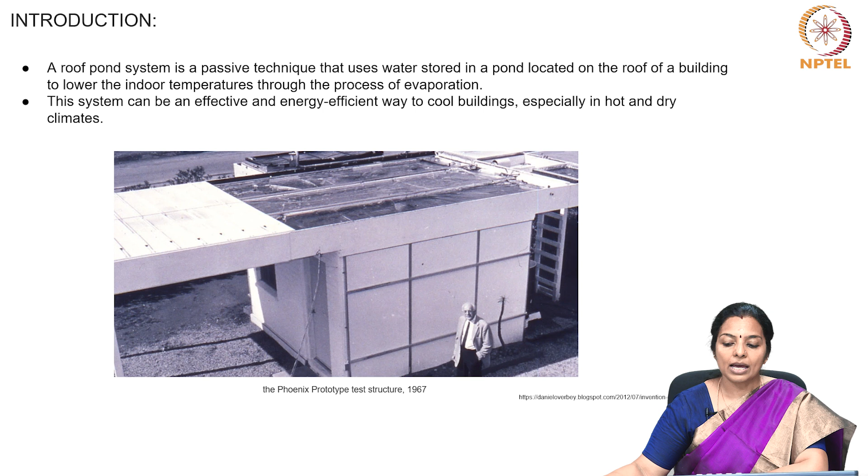Let us now see some of the components required for a roof pond, along with a brief introduction. The purpose-built pond or water storage area on the roof is frequently made up of waterproof materials. So, in order to have a roof pond, you need to have proper and adequate waterproofing done.

So there has to be, if this is the roof structure, an adequate waterproof membrane.

You need pond liners which preserve the integrity of the roof structure and stop water seepage. So the pond liners become another important component.

Also, vents on the inside of the building that are positioned to facilitate air movement and the exchange of cooled air are known as inlet and outlet vents. These are not mandatory, but they can be there.

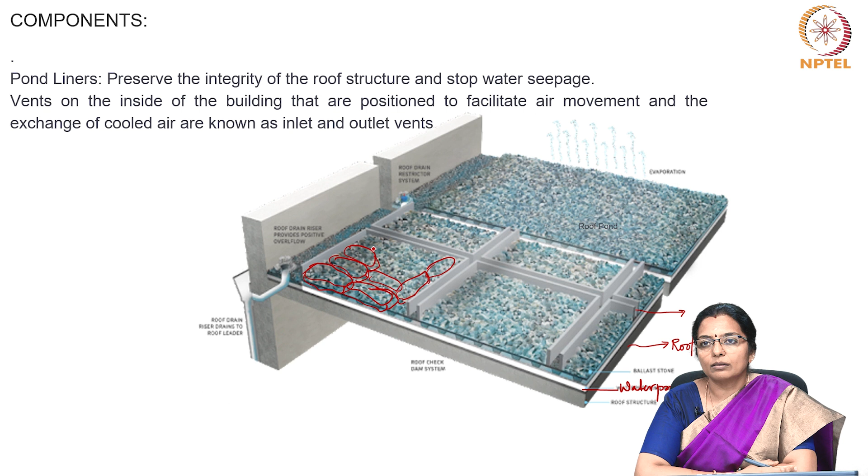Passive cooling has also been shown to provide excellent thermal comfort and consistency of indoor air, along with very low energy consumption.

If we look at the working principle, a roof pond is a passive cooling method that relies on the higher heat capacity of readily available, inexpensive water. The pond is typically covered during the day to keep it from heating up, and it is opened at night to cool it down.

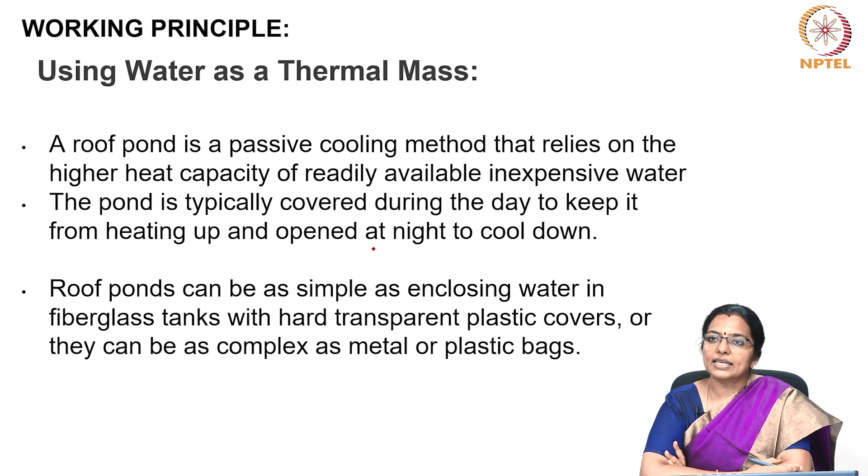Roof ponds can be as simple as enclosing water in a fiberglass tank with hard transparent plastic covers, or they can be as complex as metal or plastic bags.

There are broadly two types of roof ponds: one is uncovered roof pond, and another is covered roof pond. Further, under uncovered roof pond, we can have open roof pond without sprays and open roof pond with sprays.

Under uncovered roof pond, with and without sprays, the roof pond is not covered but is left open to the sky, and one variant is to have water spraying all along, which doubles up in two ways. When we have an uncovered roof pond without spray, we are left to the mercy of the water body to warm itself or cool itself in order to control the indoor temperature.

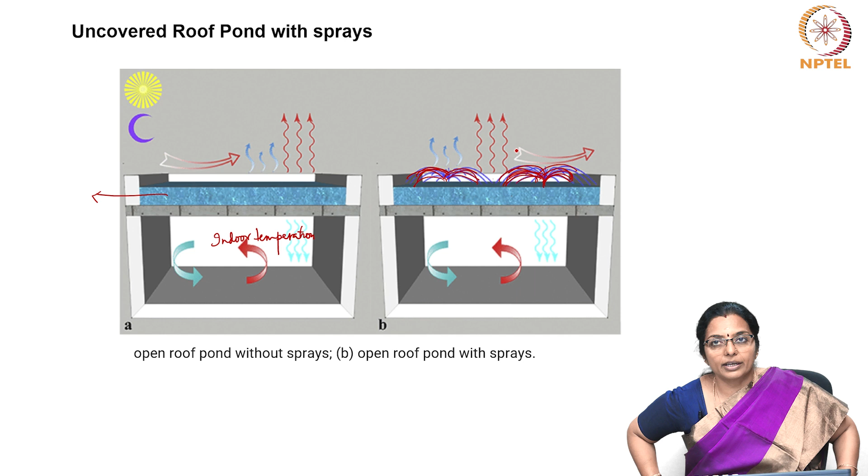But when we have a spray attached to it, what happens is not only does the water on the roof aid in cooling the building, but when new water is sprayed, there is addition of cooler water to the already existing warm water. So the pace at which the indoor comfort or indoor temperature reduces gets enhanced.

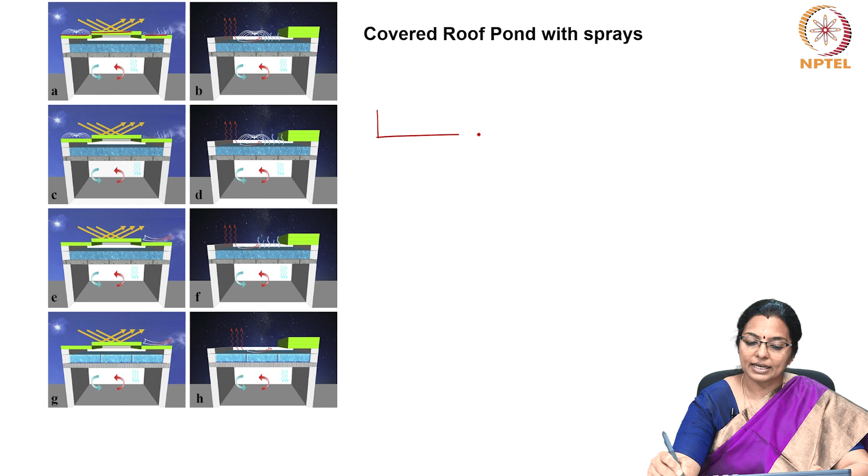The second category is a covered roof pond with sprays. Under this, the roof pond has a cover. So there is a roof pond, and there is water here, and this roof pond has a cover which is movable, which is slidable. If this is the water, this is what I call the cover.

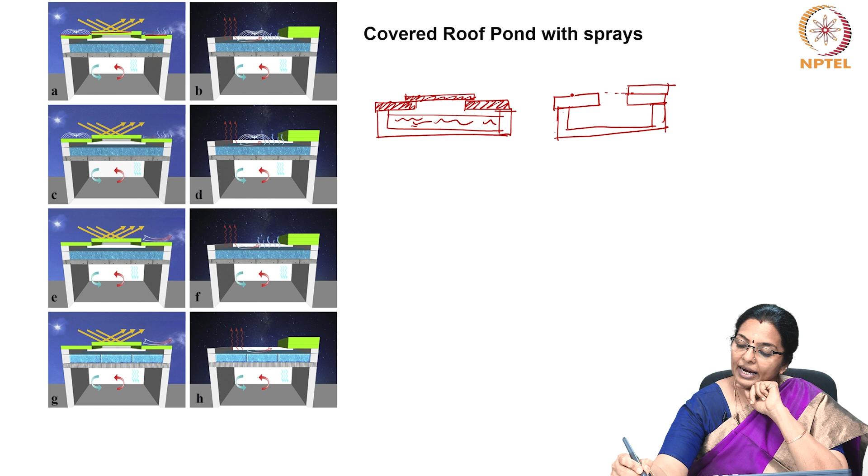One can slide this cover over this, and this can also be slid behind, leaving the tank exposed to the night sky for cooling. So the night sky cooling happens at night, and this is during the day.

Once the water gets cooled at night, this is slid back in position during the day, because of which cool water is actually trapped inside here, and that helps to make the indoors cooler during the day. That keeps the indoors cool during the day. So this is the basic principle.

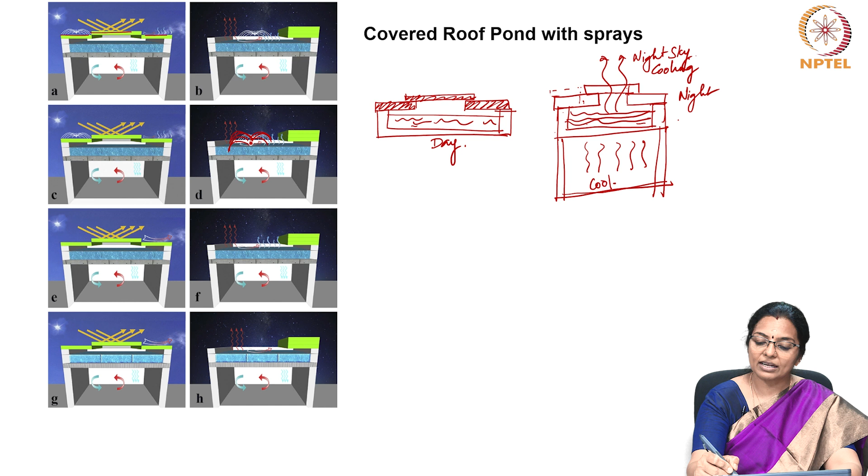Again, in this we can have two types: one is with spray, another is without spray, as shown here. So the sprays can function along with the stagnant water body.

What happens during summer? During summer, we need the indoors to be cool. So during the day, the roof pond is closed. Solar radiation strikes and is reflected back. The water body is there, and because of this water body, the indoor gets cooled during the day.

At night, one has to slide the cover open, due to which the water body gets cooled due to the nocturnal cooling of the night sky, which is the biggest cooling sink. This water gets cooled at night in summer, and during the day this is slid back into position. This is what causes cooling during summer day inside the rooms.

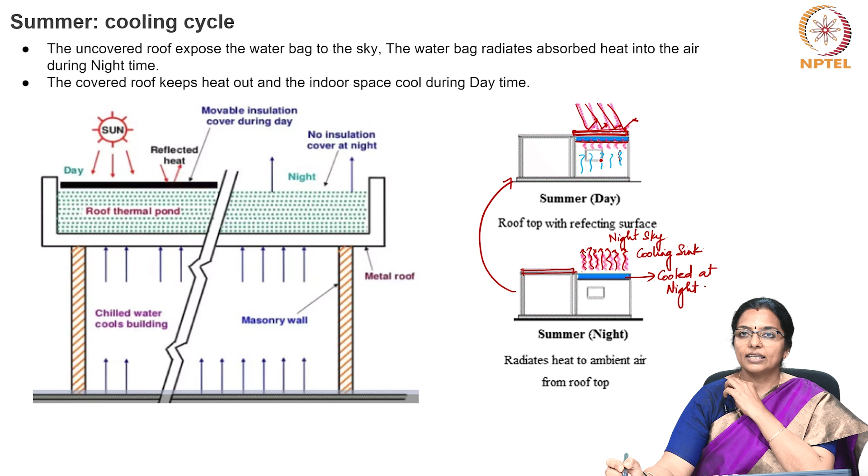What happens during winter? During winter, we would want the indoors to be warmer. So during daytime in winter, the cover is slid open so that solar radiation strikes on the water body and the water body becomes warm due to daytime exposure to the sun.

Now the water gets warmed, and during night the cover is slid back, and the warm water radiates warmth inside the room, which is actually cool during winter. So the room becomes warm and comfortable during winter nights. So the cool roof or the roof pond is used effectively during summer and winter to control the indoor temperature.

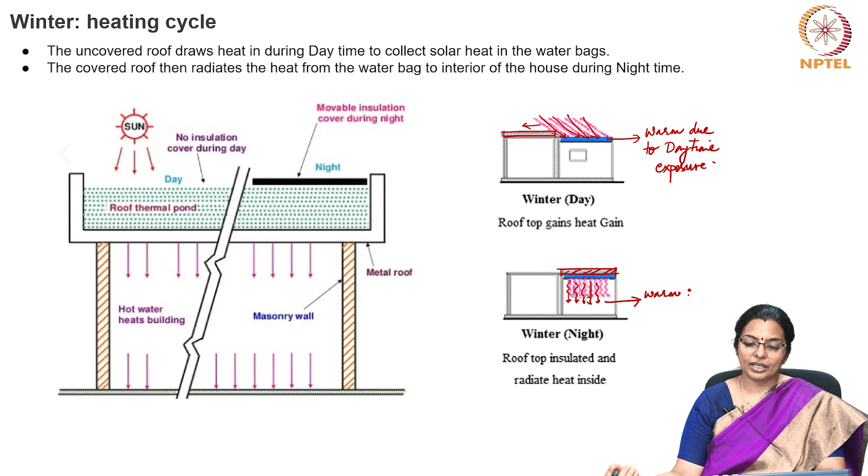Let us now look at the design considerations. First is climate. One needs to understand whether this passive system is adaptable to the climate under question. So adaptability to different climates and effectiveness in specific temperature and humidity ranges must be verified.

Second is the pond size. One needs to determine, by factors such as building size, location, climate conditions, and the cooling needs of the space, whether the pond size is sufficient. Third is materials. Selection of appropriate materials for pond construction is important to ensure durability and water retention.

Fourth is energy efficiency. It's important to understand the results and benefits of using a roof pond. The first is energy efficiency. By using a roof pond, a lot of energy can be saved, and this reduces the need for mechanical cooling systems, resulting in energy efficiency.

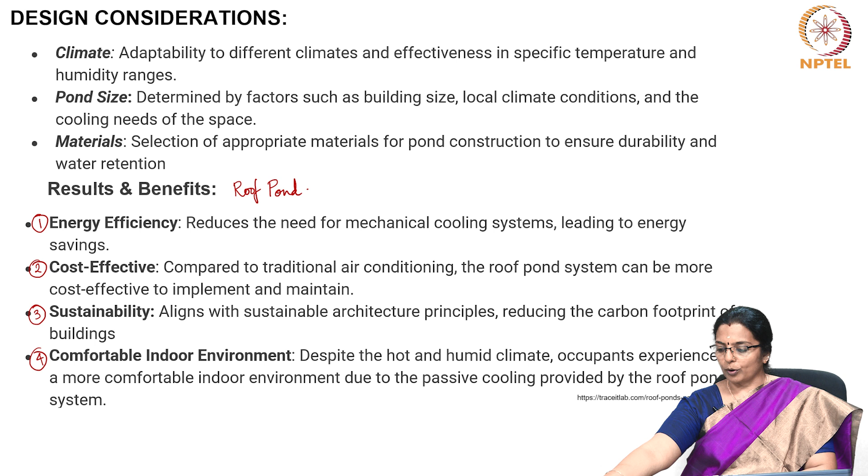Let us now look at the advantages. These systems have proved to be useful in hot, dry and temperate climates. Some variants are also applicable in humid climates, but they have been proved to be very useful in hot, dry, arid and temperate climate.

Roof ponds can also provide co-benefits in terms of stormwater management, and the stored water can be useful for some other purposes too. In case of an emergency, it can double up for fire extinguishing purposes.

The performance of roof pond is not dominated or impacted by the orientation of the building, unlike many other passive systems which have a direct connection to the building's orientation. Also, the roof pond cooling system does not interfere with indoor humidity due to the presence of water, because the water is not directly related to the habitable spaces but is physically apart. So the indirect evaporative cooling system does not bear anything on the indoor humidity.

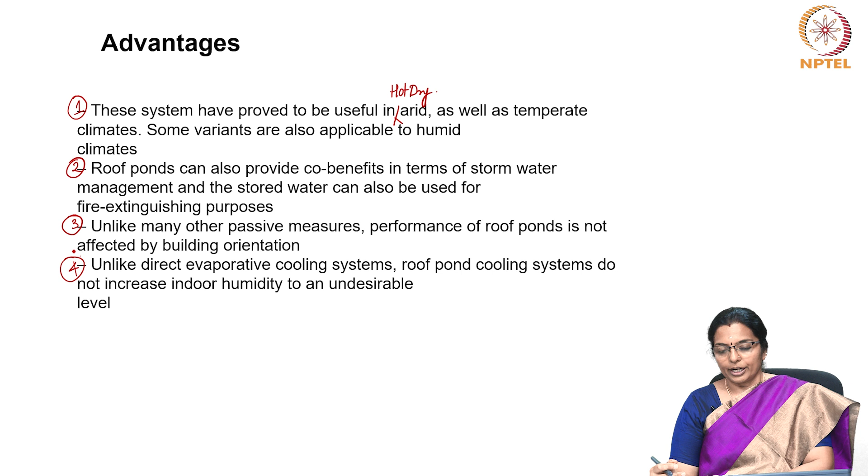Let us now look at the limitations of the roof pond system. Roof ponds increase the dead weight. The dead load of the building gets increased because of a roof pond, and water is actually a very heavy element. So this system is not suitable in buildings which are not pre-designed for roof pond, and they are definitely not suitable in structures which are lightweight.

So these systems are not suitable in buildings that need retrofitting, that is, pre-existing buildings are not suitable. New buildings designed to take up the extra load of the water works for this system.

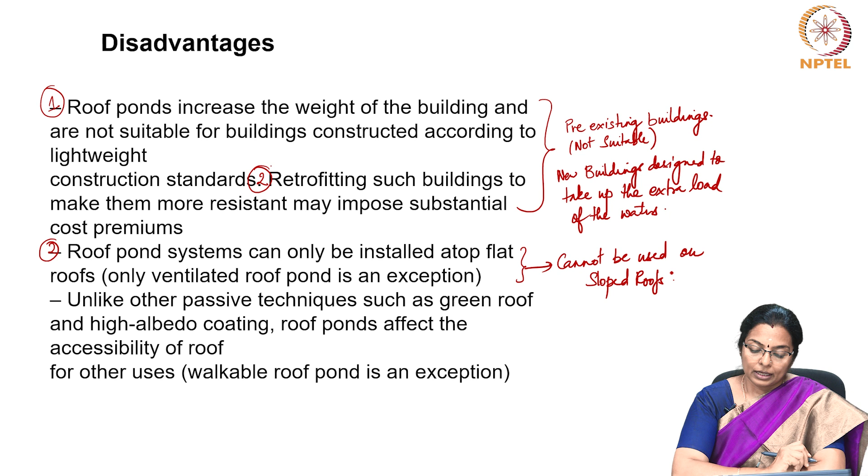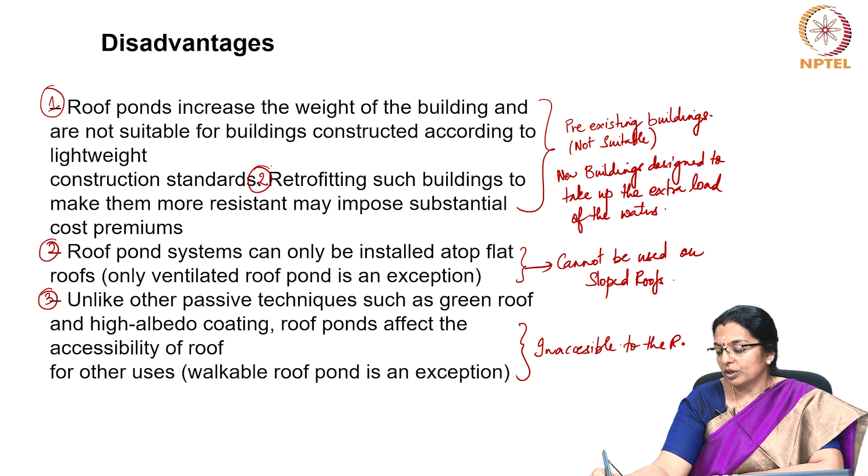Roof ponds, because of the presence of a large amount of water, can hinder accessibility. So they can be inaccessible on the roof. These are the major drawbacks.

Next, we will see the variants of roof pond. So roof pond is basically a principle, and there are many variations of roof pond. First is the uncovered pond without sprays. Second is uncovered roof pond with sprays. Third is the covered roof pond with sprays. And fourth is the covered roof pond without sprays.

The skytherm with its insulation is another variant. Energy roof, which is a hybrid system, is another variant of the roof pond. Then we have cool roofs, and walkable ponds. Sometimes the roof pond can also be designed by incorporating the provision or facility to make it accessible, so these are called walkable ponds.

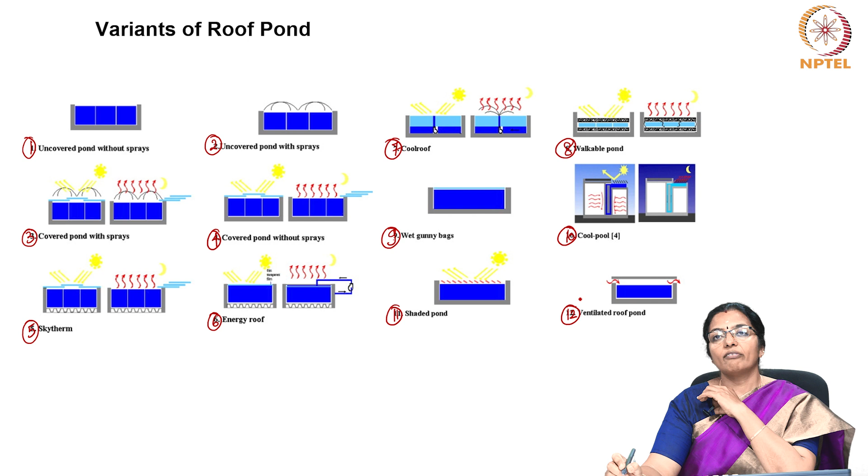Using wet gunnies over the roof ponds is another variant. Then the next variant is a cool pool, a shaded pond, and a ventilated roof pond. These are all the various other options or variants of a roof pond.

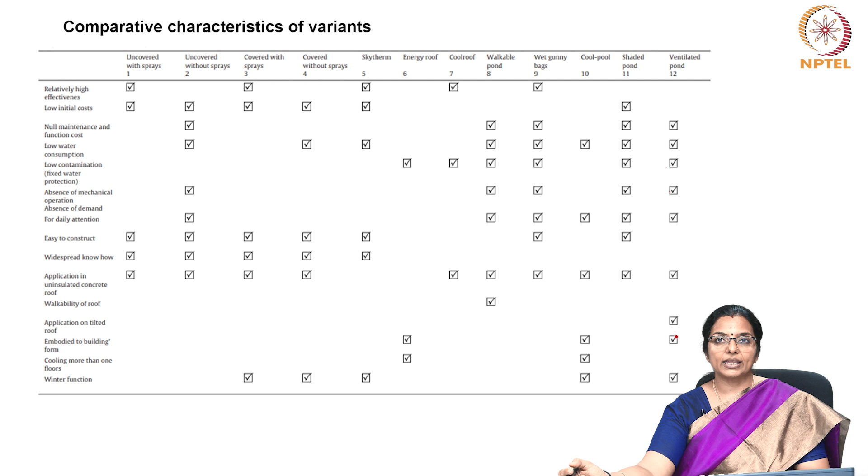So, these are the variants along with their characteristics. We will quickly see a small case study which was done on a prototype called the Phoenix prototype test structure.

This is a 10 feet by 12 feet room, and aggregate lightweight concrete block walls were used with external 1.5-inch rigid polyurethane insulation on the east and west walls. The external insulation on north and south foundations, and a 4 inches thick floor slab with a 4 feet by 8 feet panel of 1.5-inch thick polyurethane movable insulation was used.

On the south side, overhang carport for movable rooftop was used, and a 12 feet by 12 feet window on north and south walls entry door. On the south wall, there was about 6 inches to 7 inches thick water filled bags which were supported on 26 gauge steel sheets.

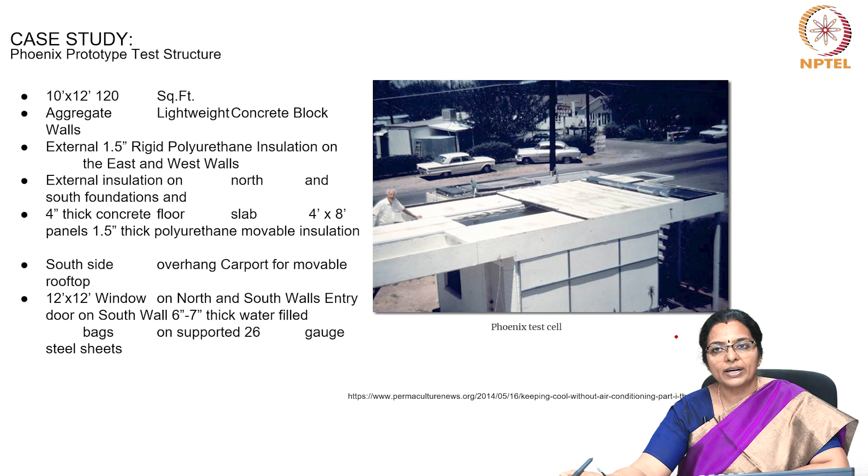The study showed that when the outdoor temperature swung between 95 degree Fahrenheit to 55 degree Fahrenheit, the indoor dry bulb temperature at 5 feet height remained fairly constant, and it was also syncing very well with the water temperature. So, on this scaled model prototype, the roof pond worked very well.

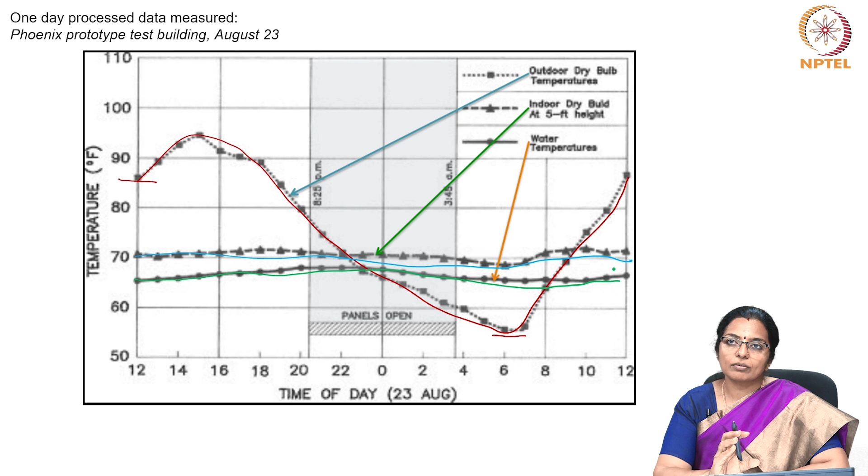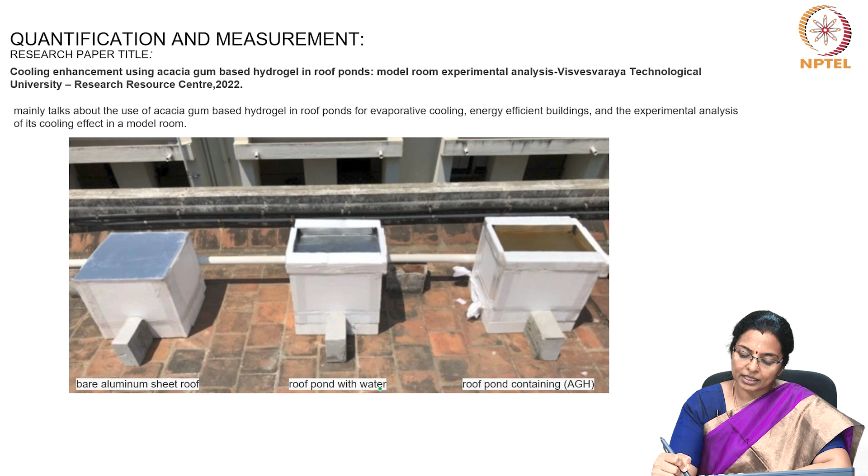Another small study was done which discussed the cooling enhancement using acacia gum based hydrogel in roof ponds instead of water. This was done at Visvesvaraya Technological University, and it talks mainly about the use of acacia gum hydrogel in roof pond for evaporative cooling for energy efficiency. So the comparison was between a bare aluminum roof sheet, a roof pond with water, and a roof pond containing acacia gum based hydrogel.

The first set of experiments were carried out, and the results showed that the experiments involved daily watering of the roof pond in model rooms with different roof components like bare aluminum sheet, roof pond with water, and roof pond containing acacia gum based gel.

The observations showed that on the next consecutive day after watering, there was a significant drop in room air temperature by around 2 to 4 degrees in the model rooms with roof ponds containing water and the hydrogel, compared to the room with bare aluminum roof sheet. The hydrogel was observed to resist evaporation and retain water, providing a cooling effect on the next consecutive day. The hydrogel based roof was found to be reusable for several days without any biodegradation.

In the second set of experiments conducted, the roof ponds were maintained dry for 3 consecutive days. The experiments demonstrated that the dry acacia gum based hydrogel, which I will call just hydrogel, over the roof was still found to result in lowering the room air temperature from 6 p.m. to 6 a.m. by about 1.5 degrees as compared to the control case.